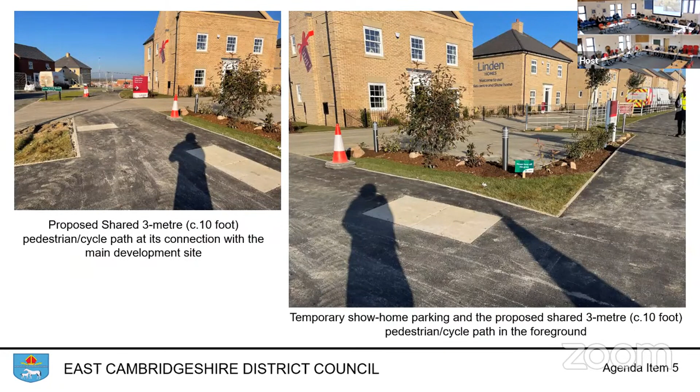This is the shared path where it adjoins the main development, and the temporary show home parking is shown in the right hand photo. This is not the site's junction; it is the point at which the proposed footpath will extend towards the Cannon Kirk development at Yeoman's Way. Not currently completed, but part of the proposals.

As set out in detail in the committee report, there is a lot of history which underpins the application before members today. I will not go into it in full detail, but I hope to provide a summary of the applications that have gone forward to reach this point.

The outline was granted in 2017, and two conditions of that outline were the provision of the footpath along Grange Lane, which was a purely pedestrian footpath, as well as a change in the speed limits along Grange Lane. This was all predicated upon the provision of a footpath immediately adjoining the carriageway, and indeed upon the basis of which the traffic regulation order has been granted.

Later, following the approval, there was a non-material amendment granted to the outline. This was to widen the vehicular access to the site marginally to allow effectively two buses to pass.

As part of the outline, it's important to note that condition 6 imposed the requirement of a design code. This design code would go forward to underpin the subsequently approved reserved matters application and any future reserved matters application. Importantly, the design code sets out mandatory as well as advisory elements, to give certainty across all parties.

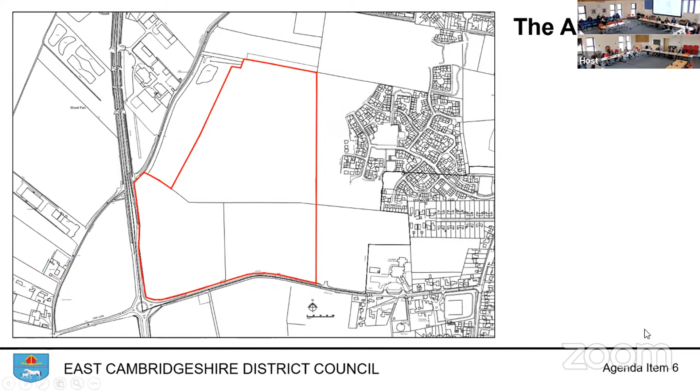As a refresher, this is the whole site, the aerial view, and then again the phasing plan. For members' information, the reserve matters focuses on the front lower phases, phase 1, 2, and part of phase 4, which is outlined in blue there.

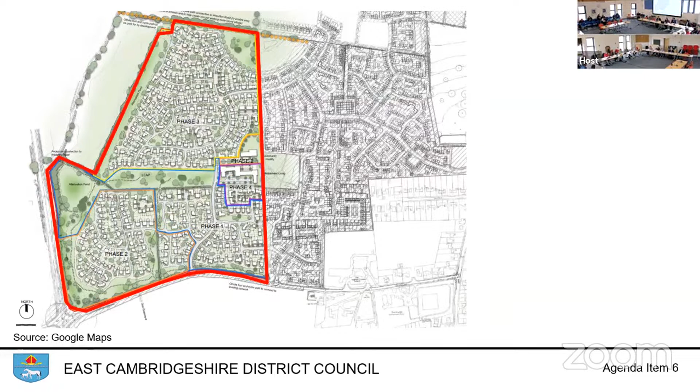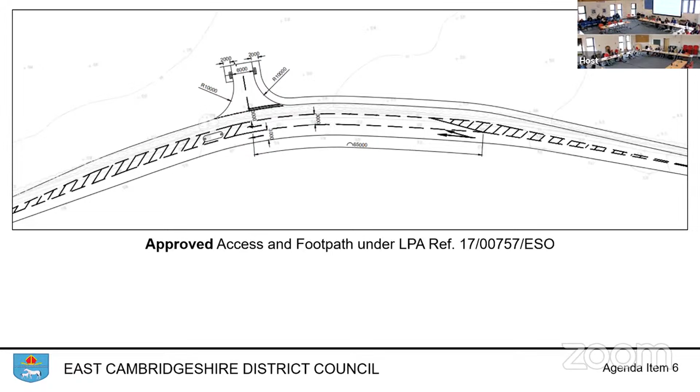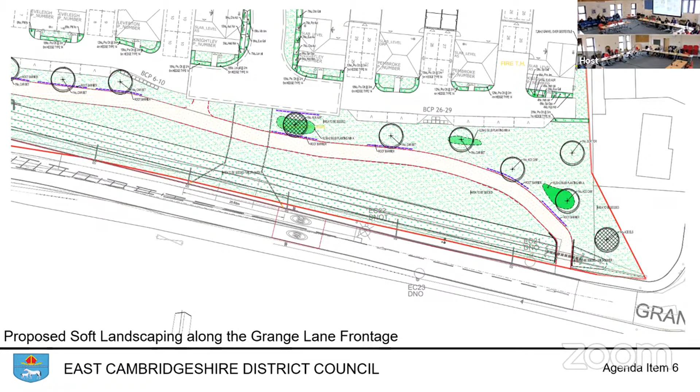Again, as a refresher, this is the proposed footpath and cycle link, the as-approved drawing, and the landscaping as proposed to reflect the updates to the shared path. Again, we have some minor changes across the whole development, including the removal of 6 car parking spaces around the local area of play shown in the right-hand image. And in the left-hand image, hatched in red, is the temporary show home extensions to provide marketing suites.

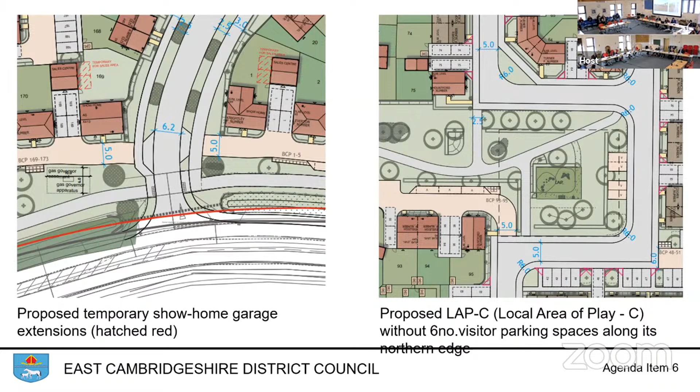As discussed in the outline, my recommendation for the reserve matters has been put forward on the basis of my recommendation approval of the outline. So I will not go into extensive discussion regarding the pedestrian and cycle access, as that has been discussed. The points remain very much the same.

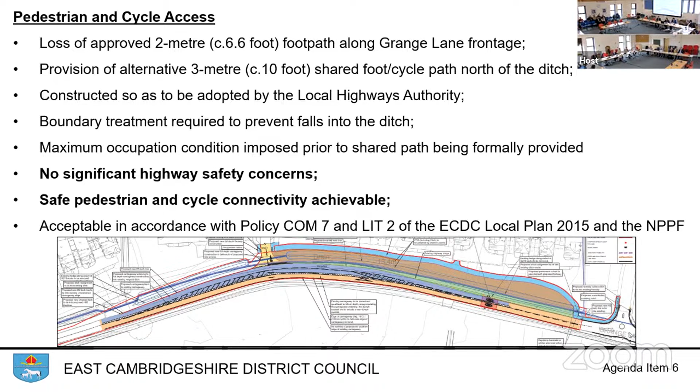With regards to the bus service provision, and this was touched on quite a lot in our previous discussions, but to refresh, the reserve matters itself, in accordance with the design code which underpins the development and was approved as part of the outline, has accommodated an internal spine road which has been designed to accommodate 2 buses passing, as well as its overall design to ensure safety for pedestrians, cyclists and vehicles.

On the basis of the infrastructure that the application provides, the development is considered to provide a suitable opportunity for a bus operator to enter the site, and on that basis is in accordance with the policies of the local plan and the NPPF.

Other smaller matters are being amended under the application proposal. The loss of visitor parking, a total of 6 spaces across the much wider site, is considered acceptable given that the development is largely in accordance with local plan policies on visitor parking provision. These visitor parking spaces are around a local area of play, which is meant to be local to the development - it's not expected that vehicle trips will be made specifically for their use, as they are proportionate to the surrounding development.

The landscaping proposed, as shown on the previous slides, has been found acceptable by the Council's trees officer and complies with the design code and its mandatory elements. The drainage and flooding matters raise no concerns from any statutory consultees. Regarding character and appearance, this is also found acceptable. The temporary garage extensions - a condition has been recommended that they are removed once no longer used for the marketing suites, on a visual impact basis.

A number of smaller concerns were raised by third parties, particularly regarding NHS contributions, waste and neighbour comments. However, these have been addressed within my report, and limited weight has been attributed to them.

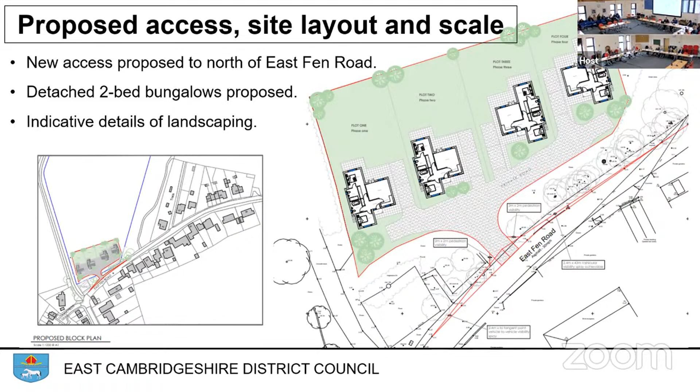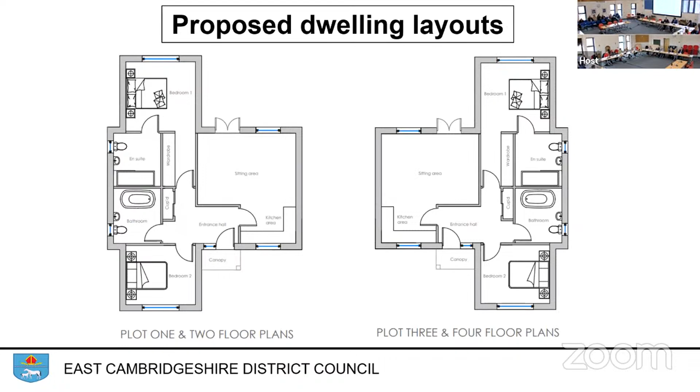The details of the proposed landscaping are indicative only at this stage. This slide shows the floor plans of the proposed bungalows. This slide shows the indicative details of appearance, demonstrating what the proposed bungalows could potentially look like.

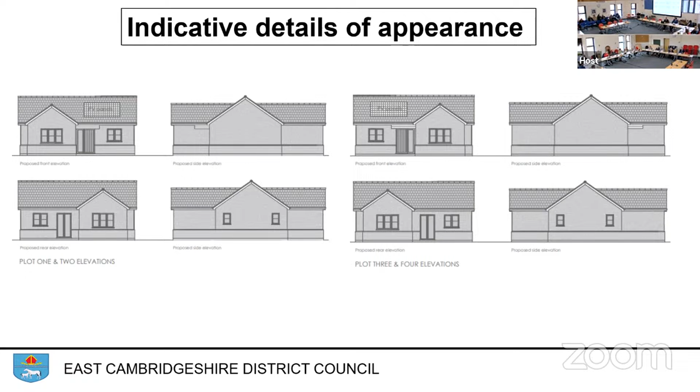Summarised: refusal reason 1, the proposed development cumulatively with proposed housing allocations and other approved residential development within Isleham would result in an unsustainable amount of residential development due to a lack of infrastructure, employment, retail and public transport within the village. Reason 2, the proposed development would create an intrusive urbanising impact upon the surrounding rural landscape, eroding the predominantly rural character of the countryside setting, causing detrimental harm to the character and amenities of the area and interrupting views over open countryside.

The main considerations relevant to the determination of this application are the principle of development, residential amenity, visual amenity, the historic environment, highway safety, parking and public rights of way, biodiversity and trees, and flood risk and drainage.

Turning to the principle of development, this slide shows the location of the application site outside of the Isleham development envelope and therefore within the countryside.

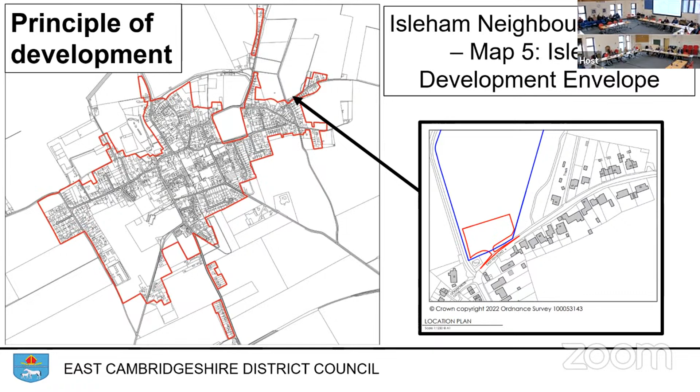The proposal is located outside of the development envelope and is not one of the exceptions listed within policy Growth 2 of the local plan. The proposal is also not located at one of the three market towns where growth is directed to by Growth 2 of the local plan. The location of the proposal is therefore contrary to policy Growth 2 of the local plan.

In addition, policies 1A and 2 of the Isleham Neighbourhood Plan restrict development outside of the defined Isleham development envelope to specific categories of exception development listed within those policies. The proposal is not for any specific categories of development that can be permitted as an exception outside of the defined development envelope for Isleham. The location of the proposal is therefore contrary to policies 1A and 2 of the Isleham Neighbourhood Plan.

Although policy 1B of the Isleham Neighbourhood Plan is supportive of proposals which provide 2-bed dwellings, meet the needs of an ageing population and are suitable for lifetime occupation, this policy does not specify that such proposals are acceptable as exception developments outside of the Isleham development framework.

The council can demonstrate an adequate 5-year housing land supply. The proposal is located outside of the development envelope of Isleham, and is not located at one of the three market towns where growth is directed to by policy Growth 2 of the local plan. The type of development is not listed as an exception in policy Growth 2 of the local plan, or policies 1A and 2 of the Isleham Neighbourhood Plan. The proposal is therefore contrary to policy Growth 2 of the local plan, and 1A and 2 of the Isleham Neighbourhood Plan.

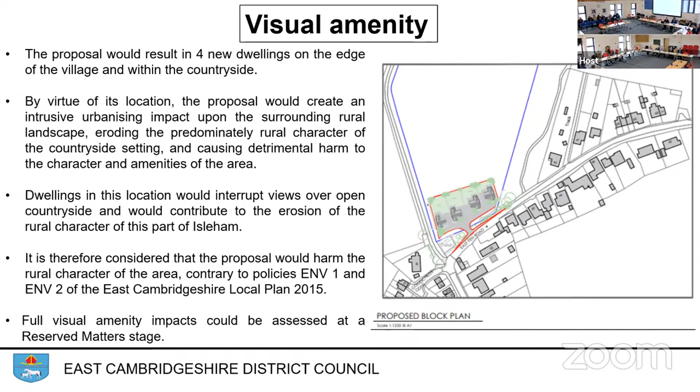Highway safety, parking and public rights of way. The proposed new vehicular access is to the north side of East Fen Road. The local highway authority consider the proposal to be acceptable in highways terms subject to conditions. The county's definitive map team have no objection to the application, and there is sufficient space for car and cycle parking provision within the site.

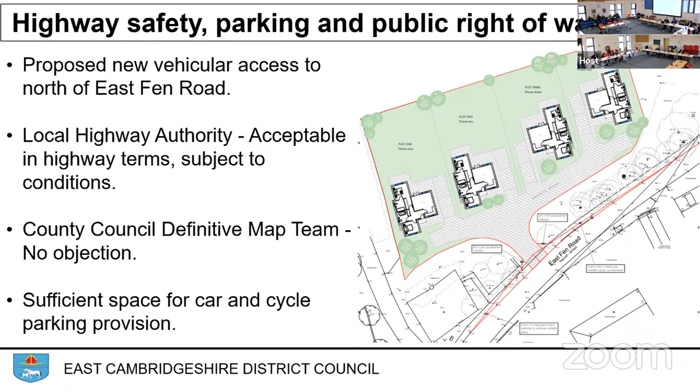In terms of biodiversity and trees, the council's trees team during the course of this application has requested an arboricultural impact assessment prior to determination of this application. The council's tree team previously considered that there was no significant arboricultural issues to refuse the previous application. On this basis, it's not considered reasonable to require an AIA for the current application, and there would be no significant arboricultural issues that would warrant refusal of this application.

In terms of biodiversity protection and net gain, the County Wildlife Trust have reviewed the ecological impact assessment that was submitted with the application. They consider that it covers all the relevant issues and makes appropriate avoidance, mitigation, enhancement recommendations. In accordance with the ecological impact assessment and the County Wildlife Trust recommendations, it's considered that adequate biodiversity protection and enhancement could be secured by conditions.

In terms of flood risk and drainage, the site is within flood zone 1, where the principle of residential development is acceptable in flood risk terms. Details of foul and surface water drainage could be secured by condition.

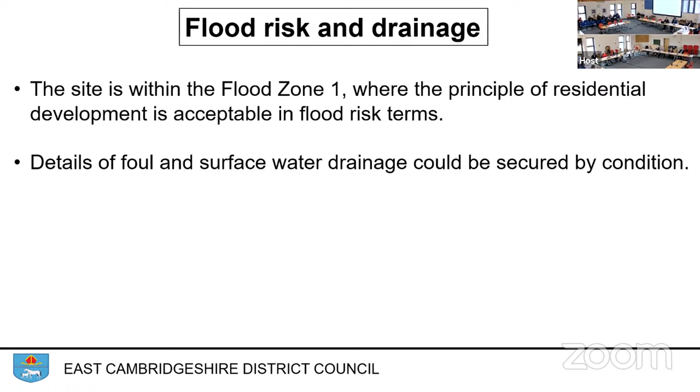So turning to the planning balance, it is considered that the proposed development would not result in any significant harmful impacts in respect of residential amenity, the historic environment, highway safety and the public right of way, biodiversity and trees, or flood risk and drainage. However, the proposed development is not for any of the specific categories of development that can be permitted as an exception outside of the defined development envelope for Isleham.

Therefore, the principle of development is considered to be unacceptable, contrary to the locational strategy for development within Isleham, as set out within Policy Growth 2 of the local plan and policies 1A and 2 of the Isleham Neighbourhood Plan. In addition, 4 dwellings within this edge of settlement location would create an intrusive urbanising impact on the surrounding rural landscape, eroding the predominantly rural character of the countryside setting, causing detrimental harm to the character and amenities of the area, interrupting views over open countryside and contributing to the erosion of the rural character of this part of Isleham. Therefore, the proposal would cause harm to the rural character of the area contrary to policies ENV1 and ENV2 of the local plan. The application is therefore recommended for refusal.